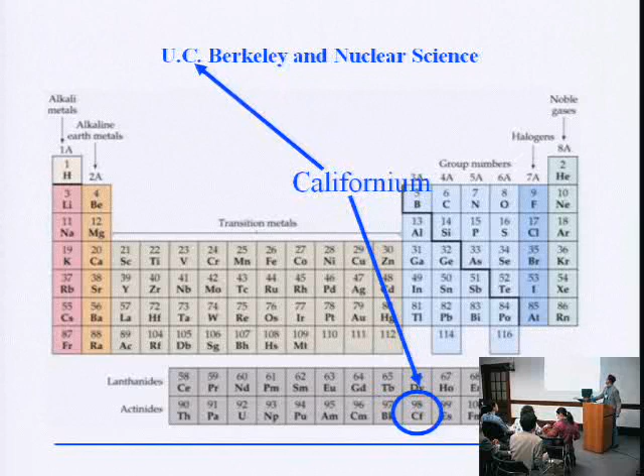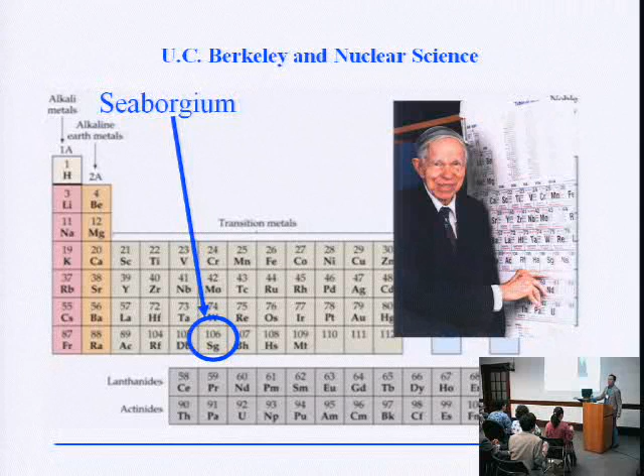Then we have americium, berkelium referring to the campus, not the city, californium referring to the state and the university, lawrencium, and then probably the only person who will have been alive and able to point at the periodic table with his own name on it, Glenn Seaborg and Seaborgium.

Let me run through a list of things that have been happening recently relevant to nuclear energy. One of the most important points is that we've seen enormous growth in the consumption of coal, driven principally by China and India. This coal is used dominantly to produce baseload electricity. Of the options that could be scaled to similar size to produce baseload electricity, we only have one, which is nuclear. So nuclear competes directly against this big global problem.

Looking at what's happening in the United States, there's been essentially a transformation in our ability to run nuclear plants reliably. When I joined UC Berkeley as an assistant professor in 1990, the average capacity factor of plants in this country was about 66%, meaning that a third of the time our plants were down, either for extended refueling outages or forced outages. Today the average capacity factor is above 90%.

Of that, less than 2% across the entire fleet is due to forced outages, which means there has been a transformation in the capability to run these very complex, actually very old plant designs with a very high level of reliability. This has turned them into the least expensive source of electricity that we have.

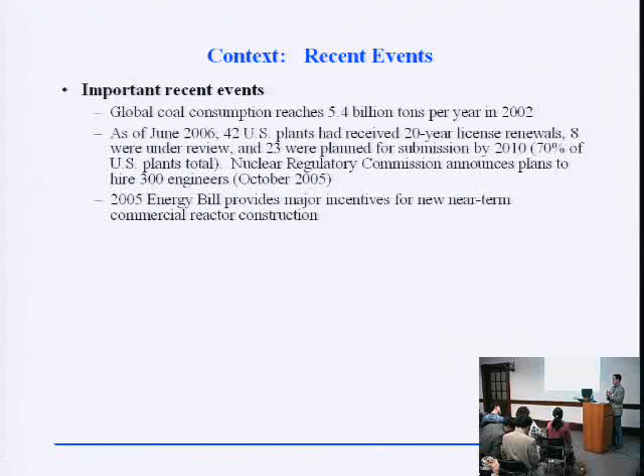Also, a very important point is that last summer, in summer of 2005, an energy bill was passed which includes important incentives that make it much more attractive to consider new construction of plants. These include loan guarantees and production tax credits for new nuclear plants, 1.8 cents per kilowatt hour, also traditionally given to renewable sources, for up to 6 gigawatts of new plants.

As of right now, we have a total of 19 plant sites that have announced they're going to docket or submit construction license applications by the end of 2008, for a total at this point of 26 plants. This means 5 of these sites are going to get construction licenses for dual unit AP1000s and 2 of them for ABWRs. If you add up the total capacity, this is now over 30 gigawatts of new capacity, which would qualify for a share of this 6 gigawatts of production tax credits.

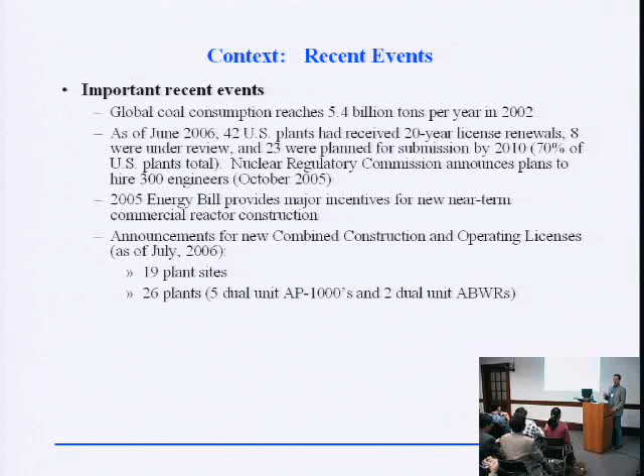At this point, it's pretty clear that production tax credits are not affecting utilities' economic decisions to purchase these plants. If there is indeed 30 gigawatts that come online within the required time frame, starting construction by 2014, the production tax credits will be diluted to the point where they're actually pretty irrelevant in the overall decision. This means the utilities making these decisions believe these plants are a competitive source of electricity compared to building coal plants. That's a very important point, because nuclear and coal compete head-to-head for baseload electricity generation.

The other big area important from the perspective of national policy is the question of waste disposal. I'm going to spend some time updating you on where things stand around Yucca Mountain, what the likely capacity of the site is, and what advanced fuel cycles could do to extend that capacity yet further.

As of 2004, average production costs - this does not include paying off loans for capital, but fuel and operations maintenance - was 1.7 cents per kilowatt hour, with average capacity factor above 90%. Nuclear energy, out of all the energy we use in the country, represents 70% of the non-fossil energy we have, and most of the rest is hydro.

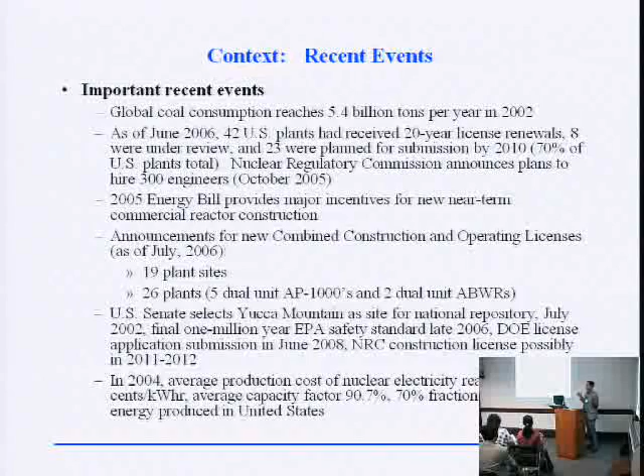This is just going back 6 months from July. In January, we had 10 utilities, 11 sites, 16 new reactors, and in the 6 months since then, it roughly doubled again. Let me give you just a quick tutorial on these sources of energy.

First of all, nuclear fission. This involves the interaction of neutrons with uranium, mainly fissile uranium or plutonium, giving rise to fission reactions which release multiple neutrons, 2 to 3, and therefore have the capability to sustain a chain reaction. The key point is these reactions release a substantial amount of energy, about 200 million electron volts.

They also generate what we call activation products, where the excess neutrons get absorbed in other elements, and also the fission products. It's these activation products and fission products that we worry about in terms of waste generation.

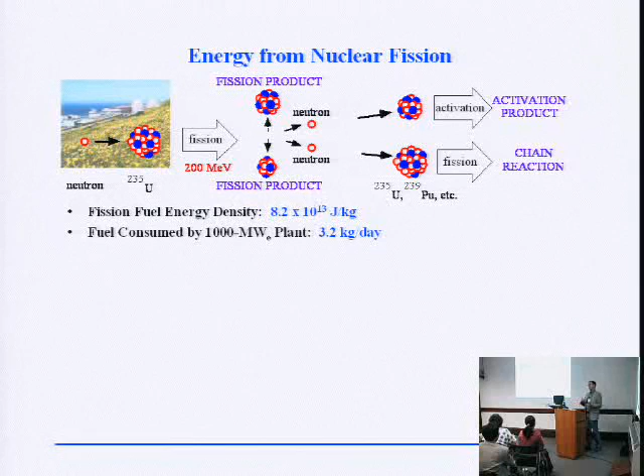In macroscopic terms, 200 million electron volts translates into a rather large number of joules per kilogram of fuel. To put it into quantities that are more easily understandable, a 1,000 megawatt fission power plant consumes about 3 kilograms of uranium per day, converting it into fission products, providing electricity. This would be sufficient for roughly 1/10 of Northern California, a plant of this size.

The things we generate in terms of waste include the fission products. Key ones to think about are strontium-90, cesium-137, and technetium-99.

We also generate a suite of activation products, including the fact that in some cases, when neutrons interact with uranium, they're absorbed rather than causing fission, building up heavy elements such as plutonium, americium, neptunium. These actually are the dominant source of long-term hazard in spent fuel. These are also things which could be recycled and transmuted if we wanted to, and I'll come back to that after a while. Neutrons are also absorbed into structures.

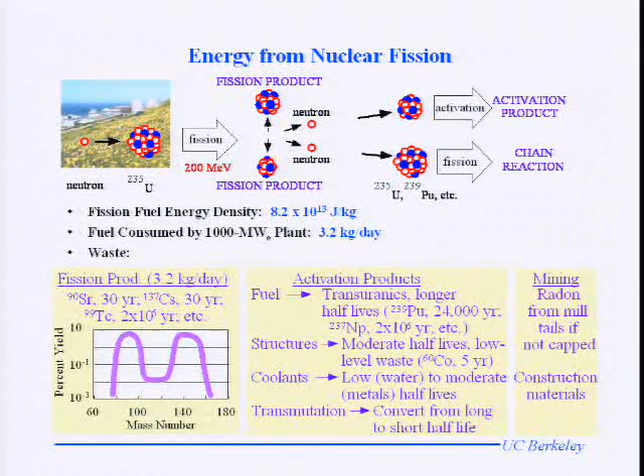In general, these radioactive elements that are generated have modest half-lives and can be disposed of as low-level waste because within 100 to a couple hundred years, the radiation levels have died away to be unmeasurable. Likewise, coolants have very low to moderate activation, and transmutation could be used for these long-lived transuranics. It's not practical for the rather small quantities of long-lived fission products.

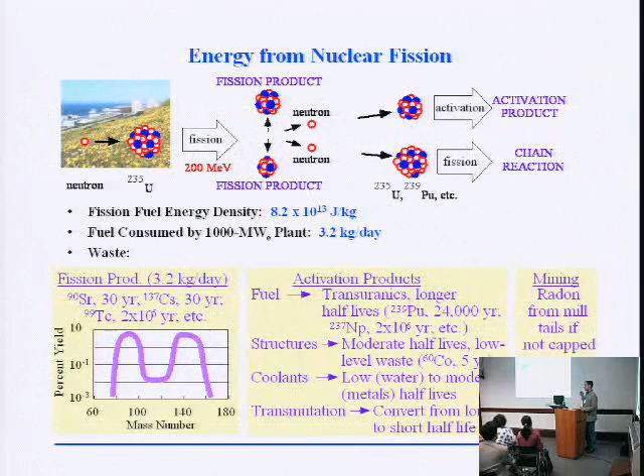In thinking about any source of energy, we need to think about it from a life cycle perspective, particularly when we start talking about sources of energy that don't consume fossil fuels. In that case, we want to look at construction and the mining of material. We need to think about what happens when we mine uranium, and also construction materials, most importantly steel and concrete.

Fusion may be where we get in the somewhat longer term. There are those of us who've worked on this problem. Fusion reaction also releases energies in the millions of electron volts. What we're doing is reacting the two heavy elements of hydrogen, deuterium with tritium, generating helium and a neutron. That neutron can go on to cause activation. In fact, we want to make more tritium, so we use these neutrons to make tritium. We can have a self-sustaining fusion power plant cycle.

This is another big number in terms of density, but to put it into perspective, a 1,000 megawatt fusion power plant would consume about 1 pound of fuel per day.

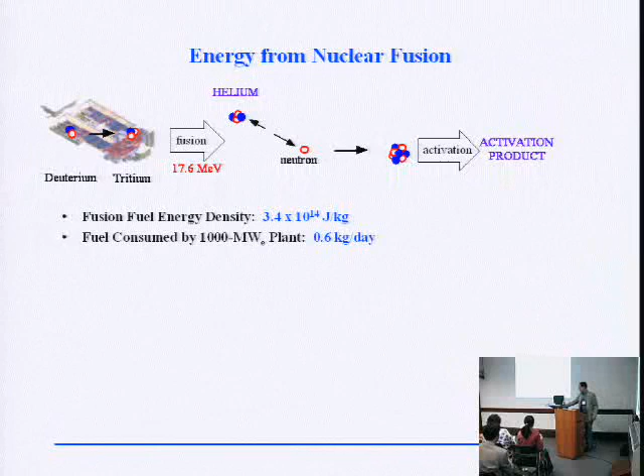In terms of waste, it would be much smaller than what we get with fission, mainly because you don't need heavy elements like uranium that form long-lived transuranics. If we're careful selecting materials, we can end up with small amounts of radioactive material, most of which decays rapidly. We still have to think about steel, concrete, and other material inputs.

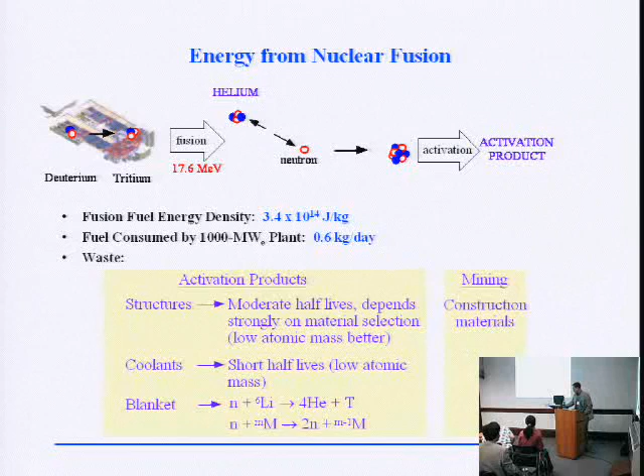Now we can contrast this to energy from fossil fuels. For example, when we take coal and react it with clean air, producing carbon dioxide, water vapor, and actually a bunch of other things as well that are not so clean.

The energy density in fossil fuels is 20 to 30 megajoules per kilogram, which means the same power plant powered by coal burns over 7 million kilograms of fuel per day. This is a massive quantity.

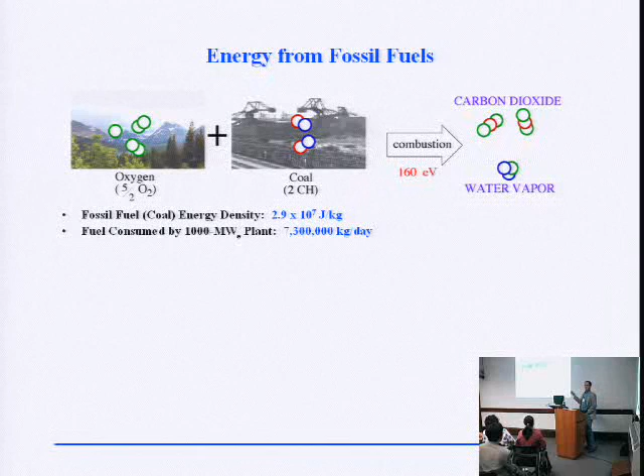70% of all rail transport right now in the United States is hauling coal from Wyoming to other places to be burned. If we look at the waste products, all of this 7 million kilograms per day is discharged out into the environment, and we'll have nitric oxides, sulfur oxides, ash, and of course carbon dioxide.

We also have substantial environmental impacts due to the very large volumes that are mined, leachates and dust from the mining, and again, it takes material to construct these plants.

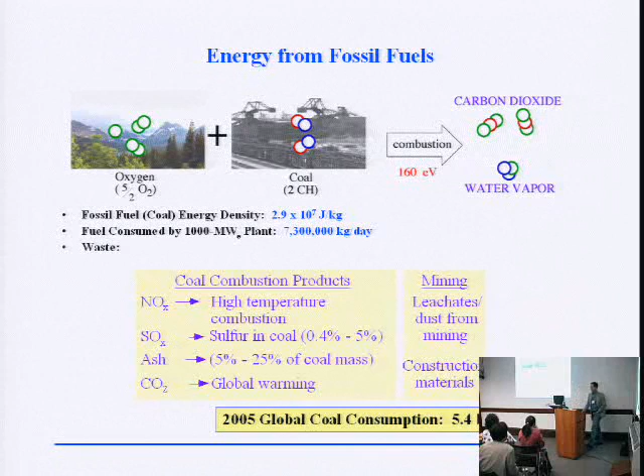Let's take a look at one possible example for what nuclear energy can do, which is France. France had a policy to replace the use of fossil fuel in electricity generation with nuclear, and they accomplished that goal in a 20-year period. They are now less than 10% fossil energy total in their electricity generation, and dominantly their electricity supply is from nuclear energy. This had a big impact.

France was invaded by Germany in World War II in part to get the coal mines that France had. They closed their very last coal mine in April 2004 because it's no longer economic for them to produce coal, given the very tiny amounts now used industrially there.

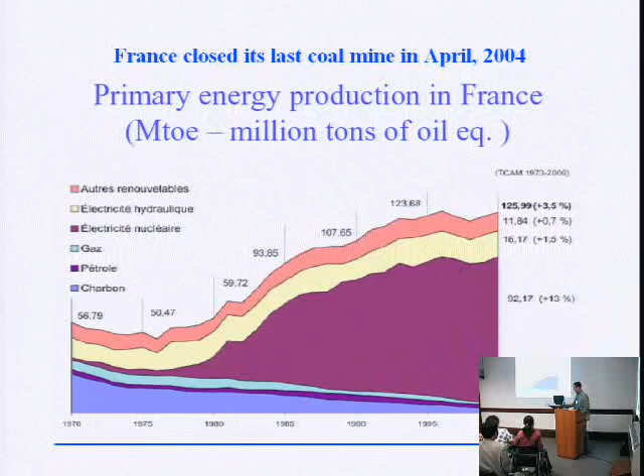Germany is a different country, and they rely extensively on coal strip mining. This is not photoshopped, this is how they mine the stuff. This actually takes as long to construct as a nuclear power plant, and it consumes similar amounts of steel and stuff. This is one of their big machines that they use for ripping up and strip mining coal in Germany.

This points to the fact that the use of coal is a massive enterprise. It is mind-boggling when you look at what is actually going on around the mining, transport, and burning of coal.

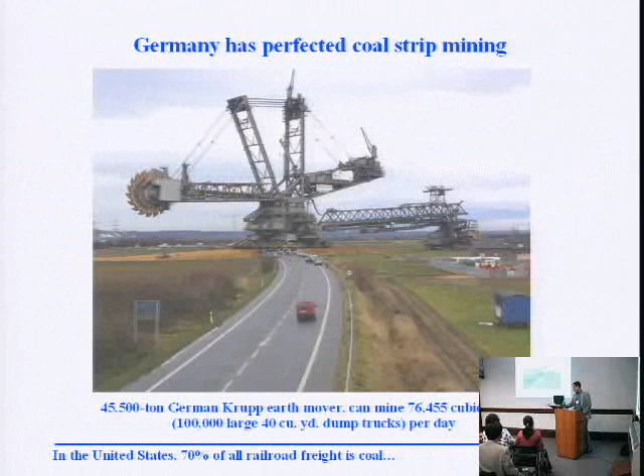We actually import a lot of coal electricity. Currently about 20% of our electricity generation comes from coal, electricity imported from the Southwest.

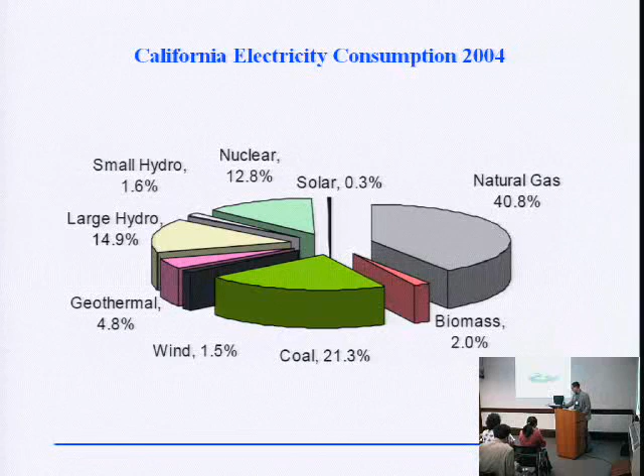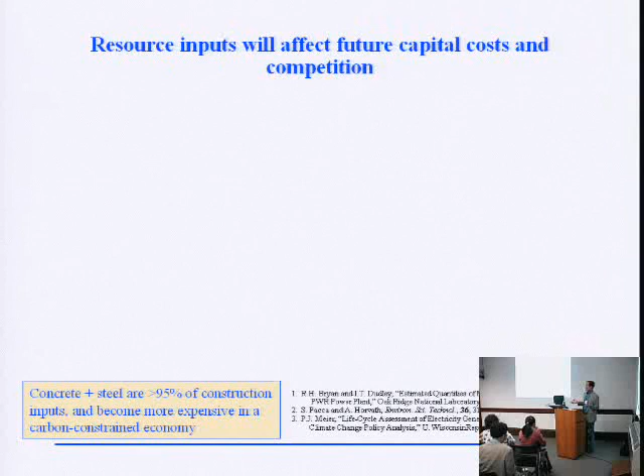So to think about how to compare different energy sources, one of the best measures I've found is to actually look at the construction inputs to build the infrastructure, because you can make claims about costs and dollars and there's lots of ways you can tweak those numbers. But the amount of steel and concrete it takes to build a plant is hard to conceal or hide.

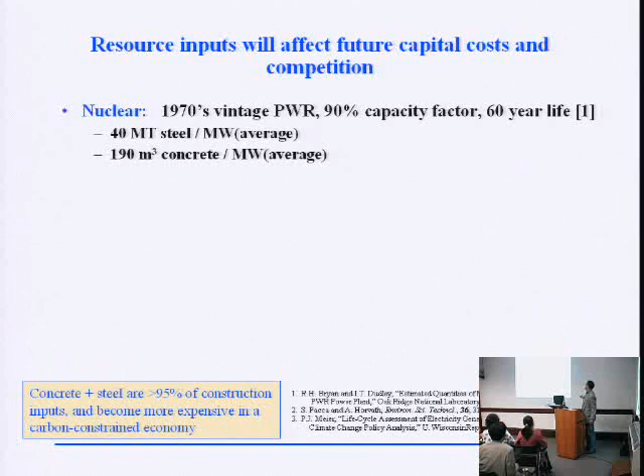For nuclear, the numbers for the types of plants we were building back in the 1970s and that are operating today are around 40 metric tons of steel per megawatt of average power output, and 190 cubic meters of concrete.

We can compare this to wind, and the same average power output generated from wind requires an investment of 460 metric tons of steel and about 870 cubic meters of concrete for a site with relatively good wind capacity.

Interestingly enough, coal is a technology that also takes a lot of material—boilers, steam turbines, all of this. In fact, it takes more steel to build coal plants, by over a factor of two, than is necessary to build nuclear plants, which suggests this is not the right thing for us to be building a lot of new plants, even though we currently are in the U.S.

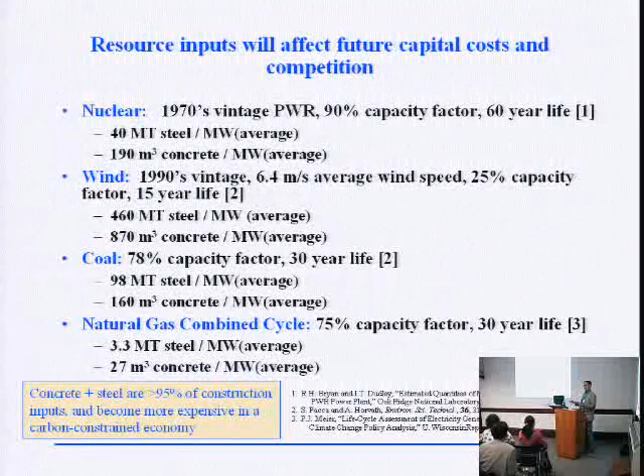This illustrates the energy policy from when we had inexpensive natural gas and thought it would stay inexpensive for multiple decades. When you start using gas turbines—things you can hang on the wing of an airplane, which you don't do with a coal power plant—the amount of material required to build this type of plant is very small, and this is why the capital costs are also very small.

We make projections about what's going to happen over the next several decades in terms of energy consumption. The Department of Energy has an Energy Information Agency that makes these projections, and this is the most recent, from 2006, their Energy Outlook report, where they are projecting at this point 6 gigawatts of new nuclear plants.

Of course, if you go back about 7 or 8 years, they were projecting premature closure of most of our existing nuclear plants. In fact, if you plot the Energy Information Agency's projections of future nuclear power plant rollout, say out in the 2025-2030 timeframe, versus the year they made the projection, linearly, we'll have 100% nuclear energy for everything by 2030 if we stay on this trend.

But that aside, what they tell us is that it's going to make a lot of difference what the capital costs are in these plants, in terms of how much new capacity one would predict gets put in. And this is all, of course, without any carbon emissions caps or trading.

It would be different. And anybody who thinks that by 2015 we won't have a carbon trading program in the United States, raise your hand. So at any rate, because then you'd have less of a tendency to see this big spike upward in coal and natural gas, and maybe some of the non-fossil stuff would start to kick in.

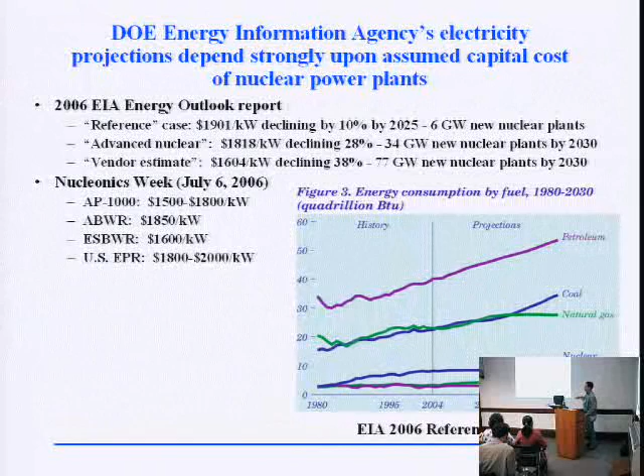So we're sitting somewhere in the mid-range. I think this makes it a very interesting question: what can we do as engineers to improve the technology so that we can get these larger reductions in capital cost for construction over the next few decades? I think there's some potential here.

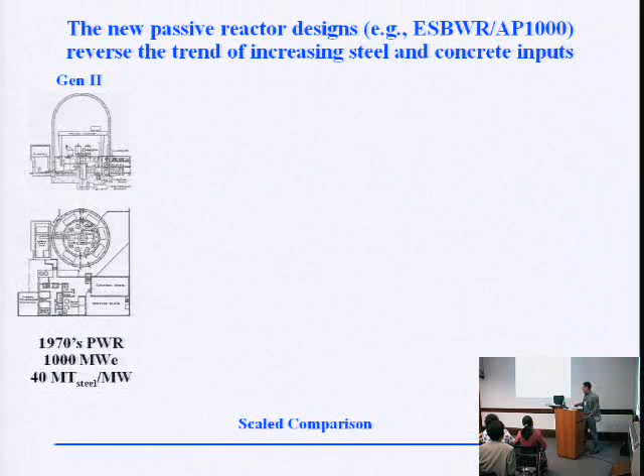Now, another thing that's interesting to look at is what's been happening with these material inputs. The plants we were designing and building back in the 70s were actually very efficient in their use of things like steel and concrete. Then we had the Three Mile Island accident, which revealed substantial, major flaws, both in how the industry was run and in our understanding of and design of nuclear plants.

In response, the plant designs that came out in the late 80s into early 90s, such as the EPR and the ABWR, involved basically massive additions—more structures, more safety systems, and a whole bunch of additional active equipment. And these plants have turned out to be expensive to build.

These are the ones that push up towards the $2,000 per kilowatt range for new construction, although the ABWRs that we have built have been built in 48 months and have started up flawlessly, all of the ones that we've built in Japan. The big change has been to develop passive safety systems for these plants which eliminate a large amount of the active equipment, pumps, diesel generators, big heat exchangers, external heat sink, and the space needed to house them. This has resulted in substantial reductions in these new passive plant designs in the quantities of material required to build them, and therefore also in the capital costs.

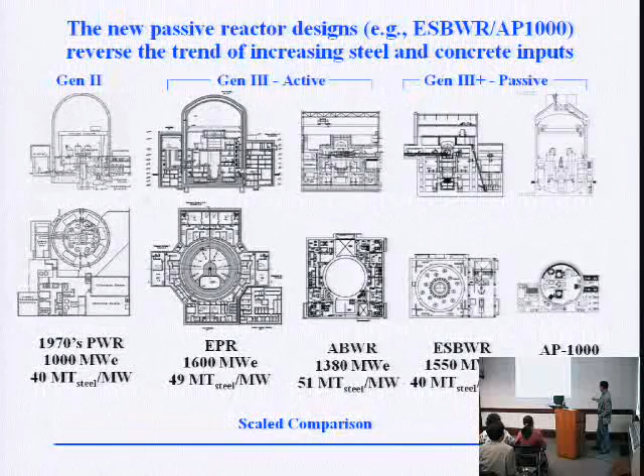At Berkeley, we did a major fraction of the work in developing the passive heat exchangers that are used for the decay heat removal in the ESBWR. If you're interested, you can grab a copy of the Forefront that's out there, because there's an article in there that describes some of the work that was done that made those changes.

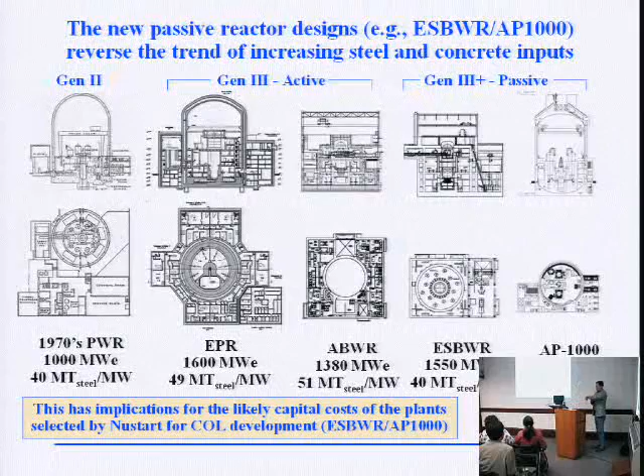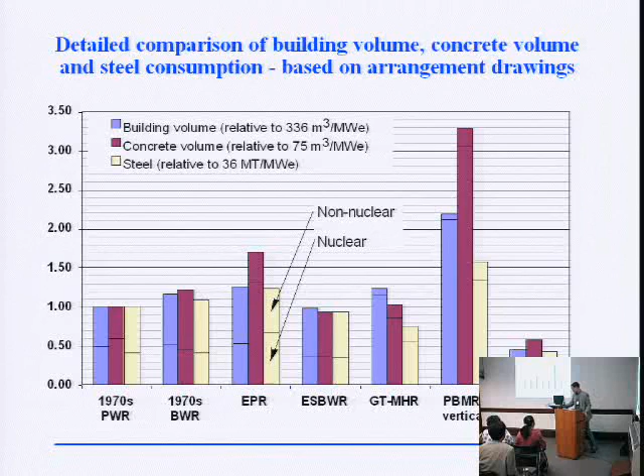Now I'm going to go through and spend some time talking about what are the environmental, public health, worker safety issues, and then I'm going to spend a little bit of time on reactors and close with nuclear waste. First thing to do is just to point out that we have some potential sources of electricity that can have very low emissions for carbon dioxide compared to fossil fuels.

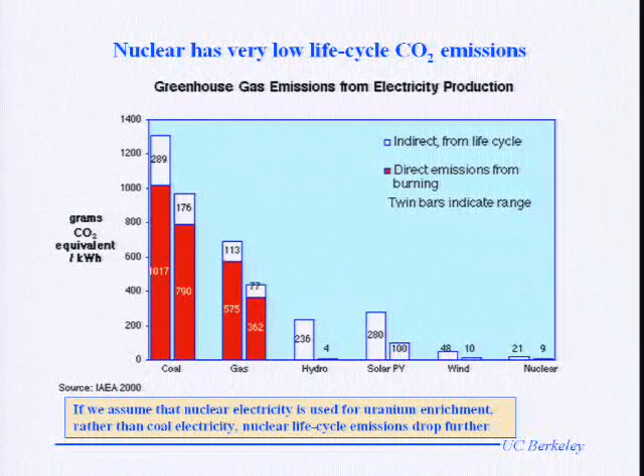If we take a look at what goes on, we should also be focused again on the question of what happens to workers and to public health. In particular, because we have regions in the world, especially China, but also India, Ukraine, where worker safety conditions are abysmal within the industries that produce coal and fossil fuels in general. Estimates are that 5,000 workers per year, for example, die in Chinese coal mines right now.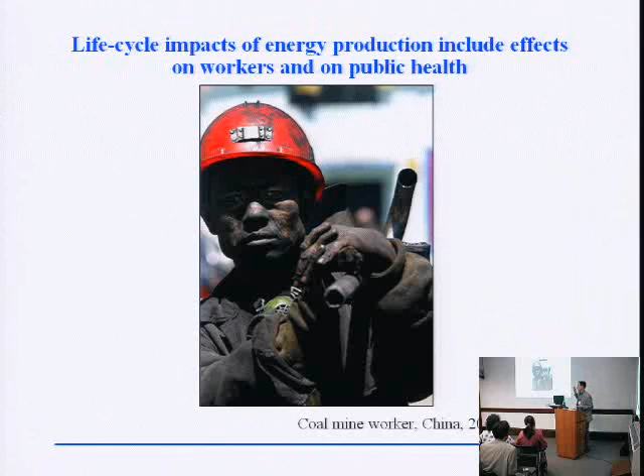That's compared to, in the United States, we're down at about 100 workers per year fatalities in our coal mines. And so it's still a big number compared to the nuclear industry, for example, if we kill a worker in the nuclear industry, we're on the front page headlines. The last time you saw that was several years ago with 2 workers, actually ended up being 3, that died in a radiation accident in Japan. And so it doesn't happen in our industry.

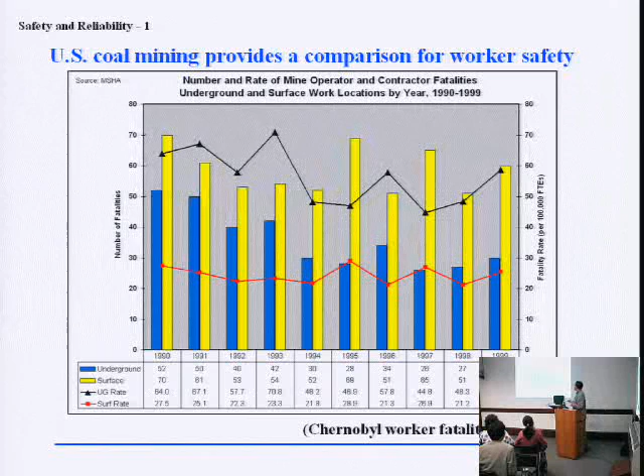So if we go to things here, these are the statistics for the United States in terms of the average numbers. Basically, if you add this up, our coal mines have about 100 fatalities per year on average. This is much better than what we had back in the 50s because we've made big improvements.

We can look at, in nuclear industry, the worker safety is more around lost time accidents. So these are the nuclear numbers, and I've multiplied them by a factor of 10 because otherwise they would be way down here and you wouldn't be able to see what they look like. So what we see is that the lost time injury rate in nuclear power plants is about 1/4 what we have in offices, and about 1/10 what we observe in traditional industries, mining and elsewhere. This also points to basically the practices that we have around safety and reliability that make sure that the workers have thought through everything they do beforehand, and they work very aggressively to keep the work environment extremely safe.

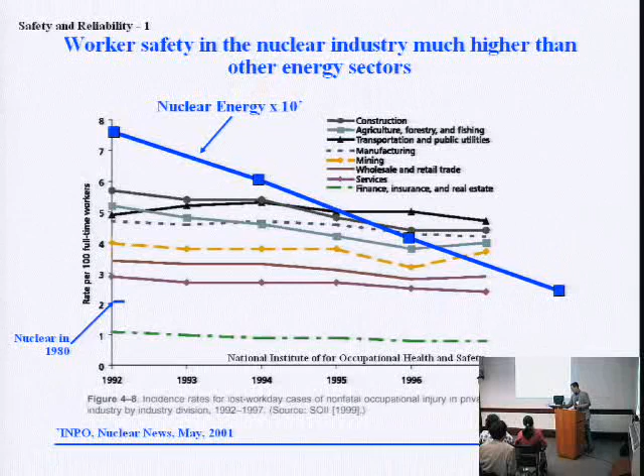We see other evidence for the healthy worker effect. There was a major study of 54,000 nuclear power plant employees looking at the potential for health effects from exposure to radiation. In general, what we find is that if you are a nuclear worker in a nuclear power plant, your mortality rates compared to the general population will be 1/3 less for all cancers, 66% for all non-cancer sources of death, giving a total of 60% lower rate of mortality, which basically means that if you go work in a nuclear plant, presumably by these statistics, you have a 2.5 times lower chance of dying than if you're not working in a nuclear plant.

Now, this actually seems pretty good, but you need to think about this from the perspective that this might not be because of radiation exposure. It's probably because you work in an environment where safety is emphasized, and you probably carry those practices over, buckling your seatbelt and doing other things on the road that are actually much more hazardous than your work environment. It might also be because you're well paid, well educated, and probably don't smoke. That's probably what you're seeing here.

But from that, you can try to tease out: if you look at the radiation exposures, is there any health effect that's detectable? The answer is that if there is, it's very small. In fact, in this study, they could not determine any statistically detectable effect from the low-level exposure that workers get.

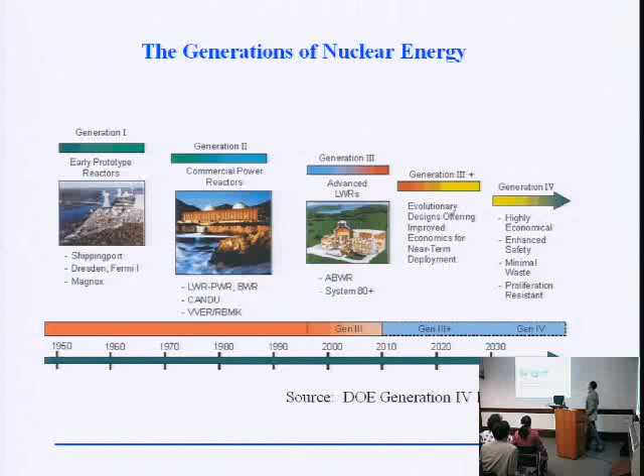Then came the new designs that have been developed, which are the ones actually slated for new construction in the United States. And finally, additional designs that have the capability to do things such as produce hydrogen, work with dry cooling, and recycle and transmute waste. These are being developed by the DOE and internationally as we speak.

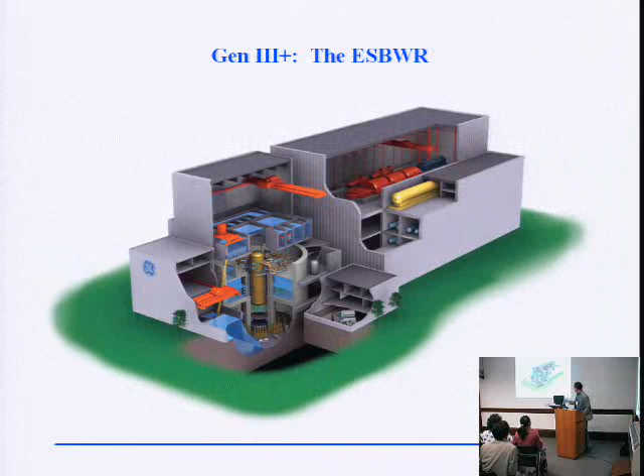This is a picture of the economic simplified boiling water reactor. Three of these units are being prepared for construction licenses. General Electric is ordering the major reactor components as we speak, because they have long lead times. This is a passively safe plant that we did a lot of work on — all of the big active safety equipment has been replaced by a small number of little heat exchangers here. At Berkeley, we did the work to develop the ability to model and predict the behavior of those.

Now let's point out a little bit about where things stand in terms of the current ability to build these things compared to what it was like 25 years ago. We know that in every other field there have been major changes in manufacturing and construction technologies. If you go to the shipbuilding industry now, ships are constructed in factories using automated manufacturing methods and are literally assembled like Lego blocks. You weld things together and can put together big cruise ships in one year. If you've ever seen or been on one of these, it's amazing to think you could do that.

So the interesting question is what's going to be different when you apply these modern design and construction tools to new nuclear plants. One thing happening is a move much more towards modular construction, where large units are built separately and then assembled like Legos, with concrete poured in. This has actually already been done commercially in Japan — they've gotten the record now down to around 46 months.

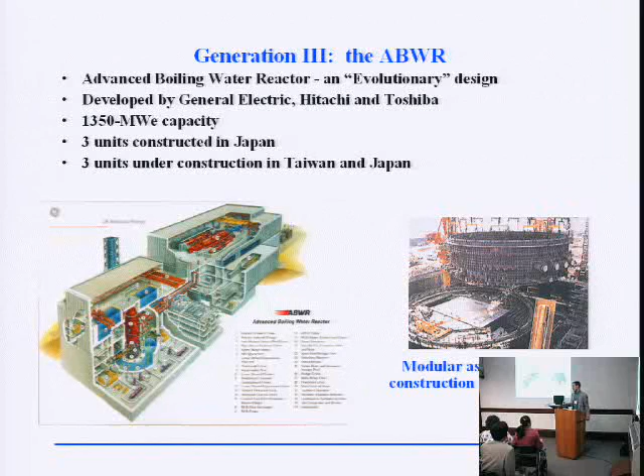And the new designs have been optimized for even more rapid construction. We'll see what we achieve, but things are changing there.

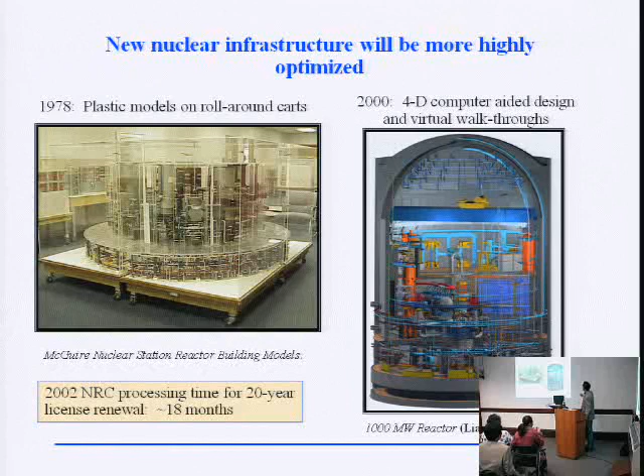Another major thing that's different is the emphasis on computer-aided design capabilities. Look at how we designed plants back in the 1970s, when they were all done with paper and pencil, drafting on two-dimensional drawings. All control of components, keeping track of equipment lists, was done manually. In order to make sure you could build the thing in 3D, they would actually build plastic models. Of course, these days we can do four-dimensional design. We can model the emplacement of major equipment components and the whole construction process, in addition to having complete 3D models for the plant as well.

Now looking at some of the things coming up in the little bit longer term: high-temperature gas-cooled reactors are interesting because they can produce electricity with much higher efficiency, since they drive Brayton cycles rather than steam Rankine cycles. They can also be dry-cooled, so they can be sited in desert or arid regions without needing cooling water. And they have outlet temperatures hot enough that you can potentially hook them up to make hydrogen directly through thermo-chemical processes.

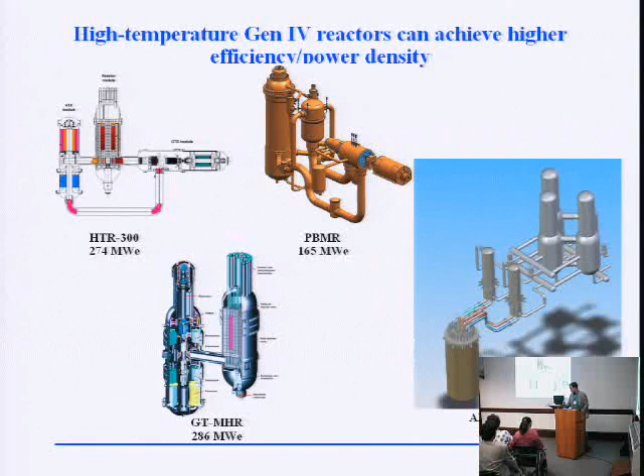Indeed, the one being investigated most intensely right now is called the sulfur iodine process. Process heat comes in, water comes in, and out of the plant you get oxygen and hydrogen through a series of chemical processes.

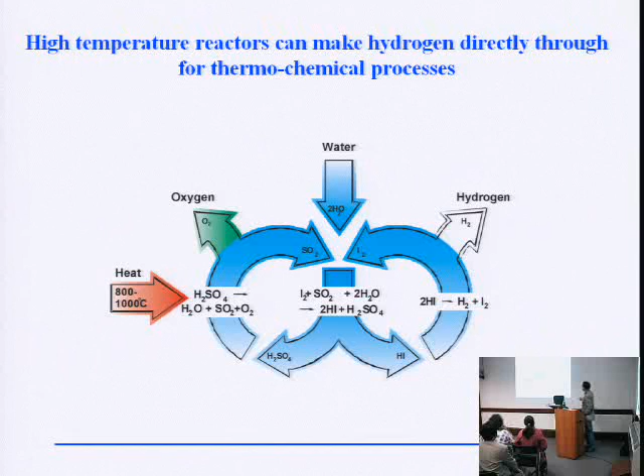Now to move to the final topic I promised to cover, which is waste management. In the United States, we've had a long, protracted, and difficult process to identify and select a site for a new repository for high-level waste and spent fuel. That site is at Yucca Mountain, about 90 miles north of Las Vegas.

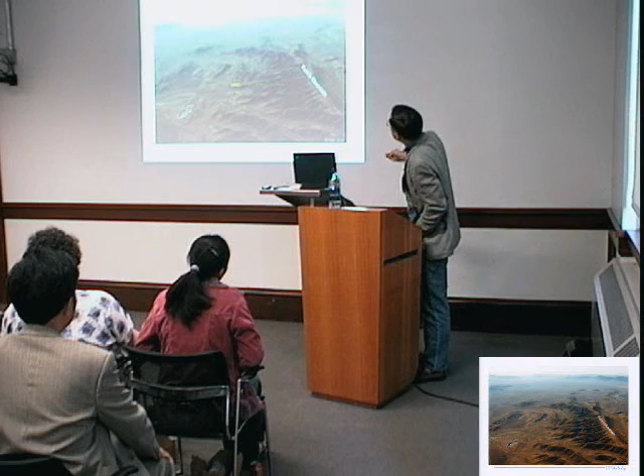Right over this third here is Bureau of Land Management owned land. This part up here, Yucca actually sits on three different plots of land, because this is Nellis Air Force Base, and this part right here is the Nevada Test Site. If you go about 10 miles off in this direction, you'll find all the craters and stuff from all the waste we've already put there under perhaps much less controlled conditions.

So Yucca Mountain has actually been selected by the United States as a site for a repository. And it's an important question how it will perform technically in terms of providing long-term isolation for spent fuel.

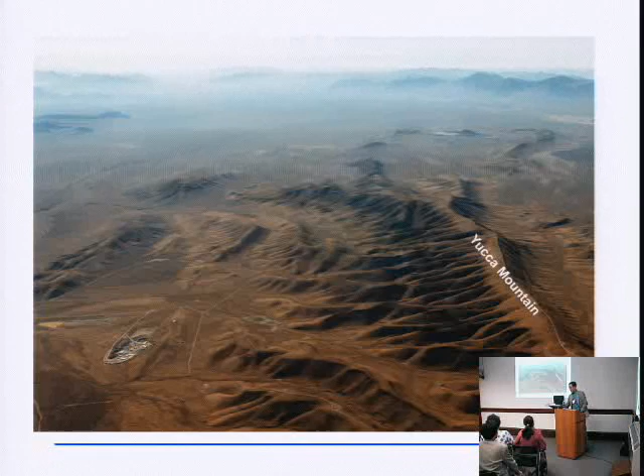First, to introduce the configuration: Yucca Mountain is unique among the types of sites being considered for repositories because it's not located below the water table. This creates advantages and disadvantages. Overall, it probably increases the flexibility of the site in ways that make it more attractive than a saturated one. The key point is that you can pump air from outside through these drifts for multiple decades to continue removing decay heat from the waste after it's been emplaced.

This gets us to the whole philosophy behind geologic disposal. We know, for example, 100,000 years from now, right here in Berkeley, things are going to be much different. But if you go down 1,000 feet, things change much more slowly. When we look at deep geologic isolation, the main reason it's interesting is because you can extrapolate from what's been happening over the last many million years into what might happen in the future.

The biggest scientific challenge posed in developing a repository is predicting the effects from having perturbed that environment, both by drilling tunnels in it, and even more significantly from the release of heat from radioactive decay, which heats the ground, changing the hydrology, changing the chemistry, and potentially even causing permanent changes to the composition of the rock. So controlling and modeling heat is the major thing that's done. A lot of work at Lawrence Berkeley Lab, Lawrence Livermore Lab, and also at Sandia in this area has developed a pretty good understanding.

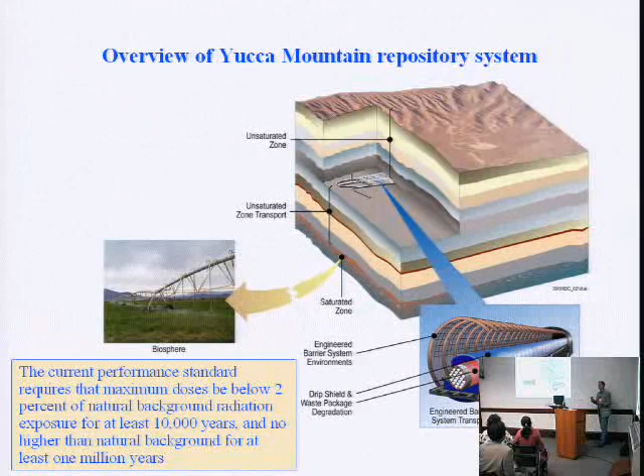What we're trying to do is assure that over the next 1 million years, groundwater that might leach through the repository, contact the waste, and transport radioactive material down to the water table and about 10 to 12 miles to the Amargosa Valley, where it becomes shallow enough that people could use it for irrigation, would not expose those people to doses exceeding what they'd receive from natural radiation sources. This is what the DOE is required to prove for the next million years, the worst possible outcome.

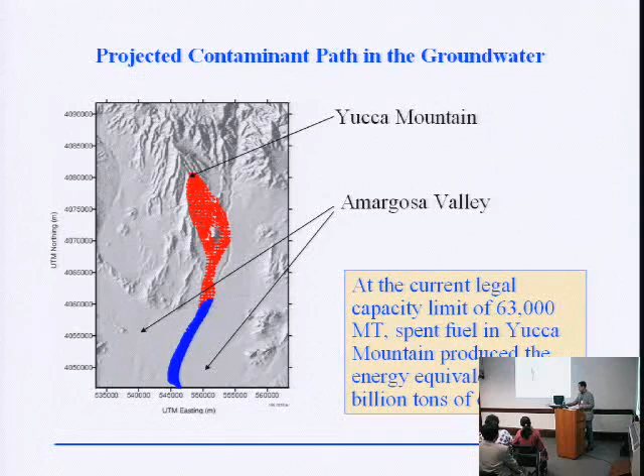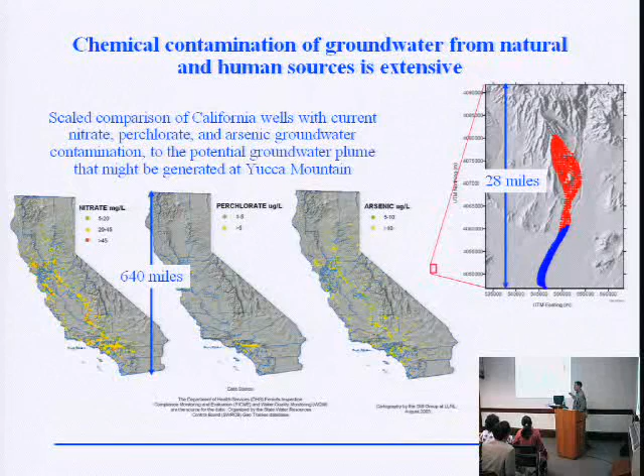So the worst case outcome from Yucca Mountain is that you'd have one or two more yellow dots down in this little box, where Yucca Mountain will be. The interesting thing is it's technically quite plausible we can provide reasonable assurance that the combination of all the things that would have to go wrong is sufficiently unlikely, so that for the next million years the groundwater in these areas will not get contaminated.

If we wanted to increase the capacity of the site, which we'd need to do for new reactors, the first thing is to remove the statutory limit on capacity. The technical limit for spent fuel on the 2,000-acre site would be this amount by 2014, and this is the total amount our currently operating reactors would produce. We could build another 100 reactors and still be well within limits, and given the extra area, probably a couple hundred more before stressing the site's capacity.

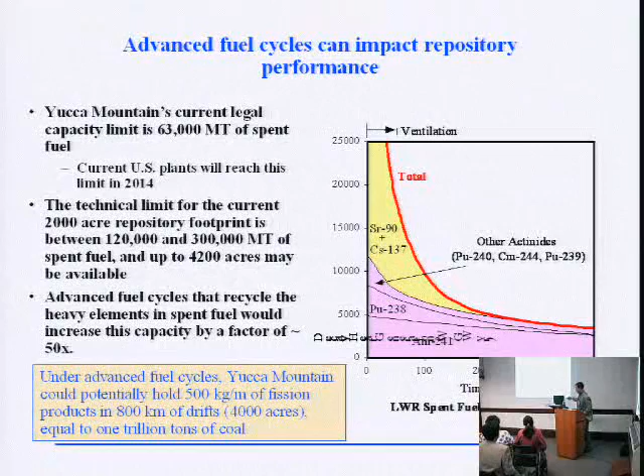But when we look at what advanced fuel cycles can do, if you recycle the heat-generating actinides, which dominate the load, we get factors of 50 increase. My best estimate is that the site, if used only for fission products, with about 800 kilometers of drifts in 4,000 acres, would be equivalent to the energy production from 1 trillion tons of coal—about 1,000 years of current U.S. coal consumption. It's relatively large, but there's probably no need to rush since the site, even for spent fuel, has a lot of capacity.

This is a list of what's been happening. Yucca Mountain is a politically divisive project, run by the Department of Energy, which isn't renowned for its ability to do big projects in the nuclear field with a lot of finesse. So it's about a factor of 2 behind schedule, and it's over budget.

But we did the same thing with the WIPP repository in New Mexico, which is taking military transuranic waste, and eventually it's possible we can get there. This requires a couple of big steps—we want to get the final EPA ruling that will shift from a 10,000 to a million-year safety standard.

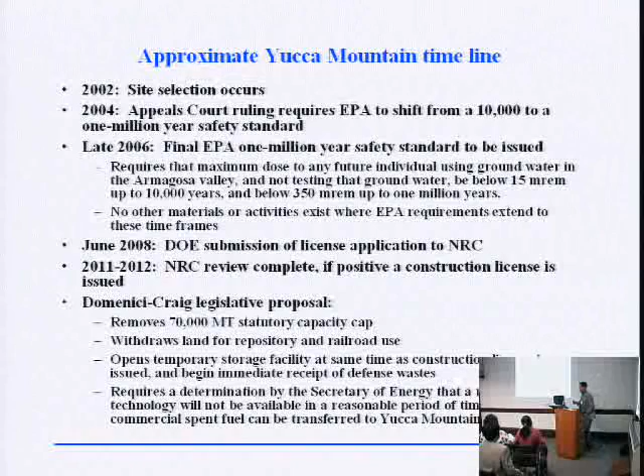We want to get a license application docketed in 2008 with NRC review. A few things that could be done in terms of policy, like removing the cap and putting in place some other measures, would allow this to be used as a flexible site capable of handling all the waste we might generate in the next 100 to 200 years from using nuclear energy.